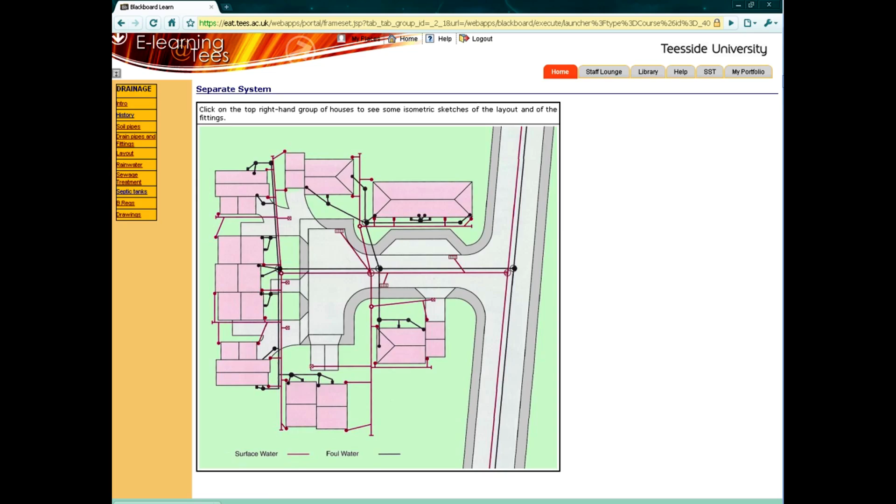So have a look through the website, get an appreciation. And when I say appreciation, don't try to remember all the little names of the different individual items. Get to know the main sort of layouts.

Understand what a pipe is. You've got your rainwater pipe that goes down into your gully, and then the gully goes down into your storm sewer. That would also pick up all of the gullies on the road, and all of that's going down towards the watercourse.

Then you've got the red here, which is our foul sewer. That's going to another gully, but picking up your kitchen waste, etc. And then you've got your toilet shooting all that stuff down into there. Everything goes down, especially in the foul sewer.

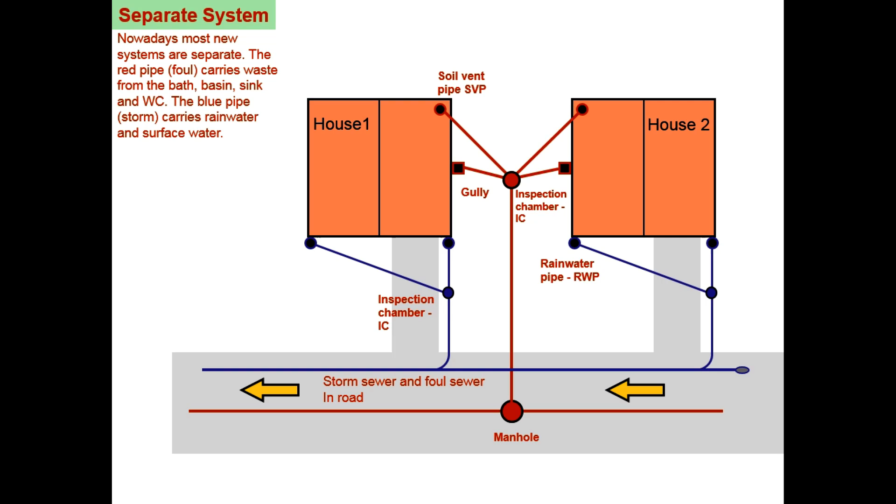You don't just unplug it and let the water go down the system, because the pipes couldn't cope with it. So they tend to go into tanks, and then it's let into the system at a rate that the pipes can cope with, and that you've agreed with the Environment Agency.

The video went through some typical components of a drainage system, and if you look through one of the exam questions, you possibly have to draw the layout of a drainage system or talk about the problems of a drainage system.

You've got all the rainwater gutters, and you probably won't be involved in designing toilets and pipework within the house. It may be that you will, but a lot of the time it's the mechanical engineers who do that. There's a British standard where you count how many baths there are and how many showers and toilets, so you can work out the system for a day when everybody uses everything at once. But it's usually mechanical engineers on larger projects.

For houses, the size of pipes tends to be standardised because we do the same type of things in our houses. So gutters and the down pipes are all standard sizes, and you'll find that most of the drainage we choose for a house tends to be the same.

There are rules about a minimum amount of gradient. If it's too shallow and the water's moving really slowly, everything you put down the pipe will stop a little bit if it's not moving fast enough. All the sand, the sweet corn, you go to the toilet and everything flows down, and sweet corn and baby wipes are a drain's worst enemy.

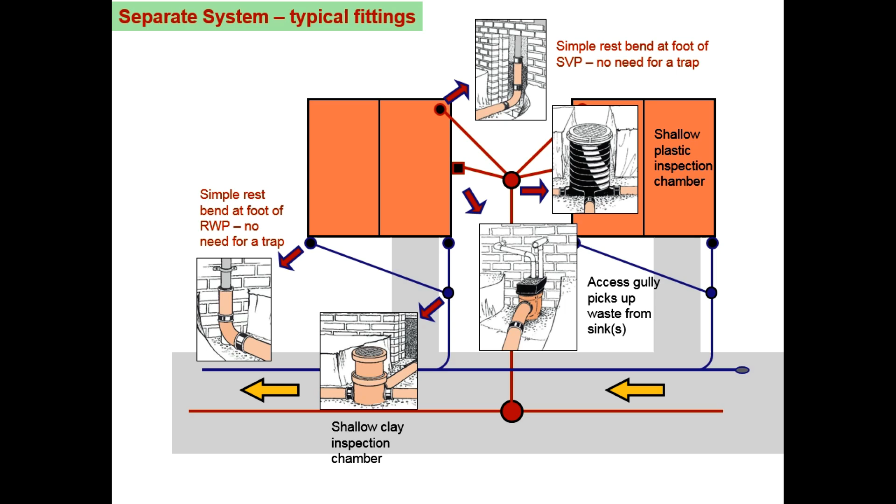So yeah, those are the main things to have in your head if you had to do a design. It talked about the different types of problems you can have on site, and you've got this drawing in your handout.

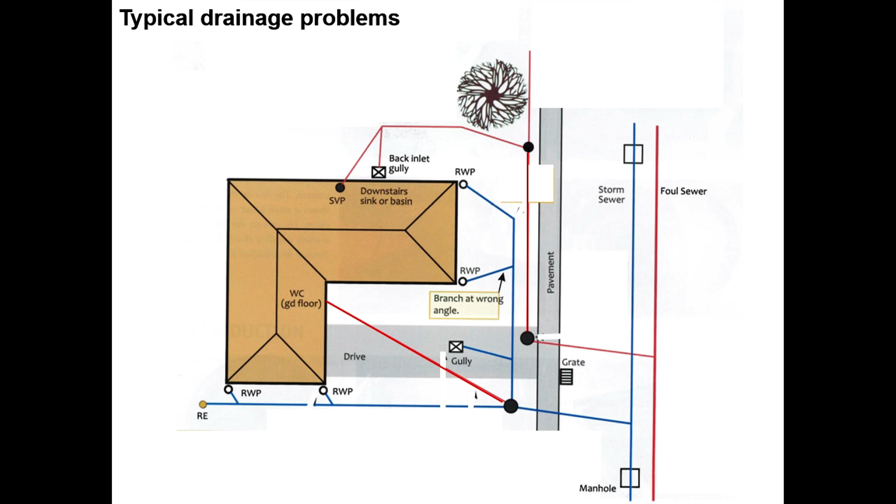Right, that's an overview. So I've given you a quick overview of drainage. So when you look at that topic, don't get too deep into it.

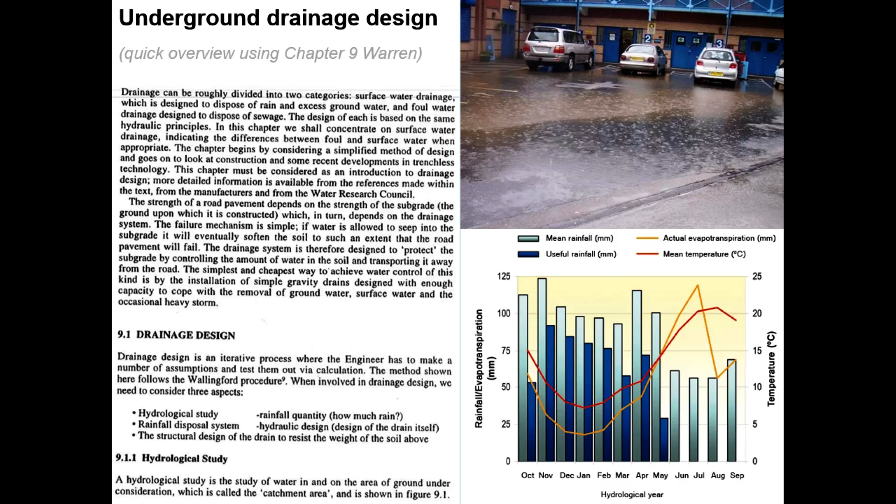When the rain comes down, it lands on an area called the catchment area. It's like a big net, and usually you would use AutoCAD and all the levels to work it out. Like this example in the booklet, there's going to be a dam here, and they want to work out what the catchment area is. It works out - this is the area, and you measure it in hectares, and all of that goes into that area.

Like in Middlesbrough, all of the water arrives everywhere and comes down a number of banks, and they go into culverts, and if there's too much water coming down, it all goes into Albert Park Pond. The pond itself has been designed - so there's our pond, it has a particular volume. So when there's loads of water coming down, raining everywhere, because the pipes can't cope with it, it fills up Albert Park Pond.

Now, civil engineers weren't maintaining the pond, so after a number of years, the bottom of the pond was full of silt and shopping trolleys and you name it.

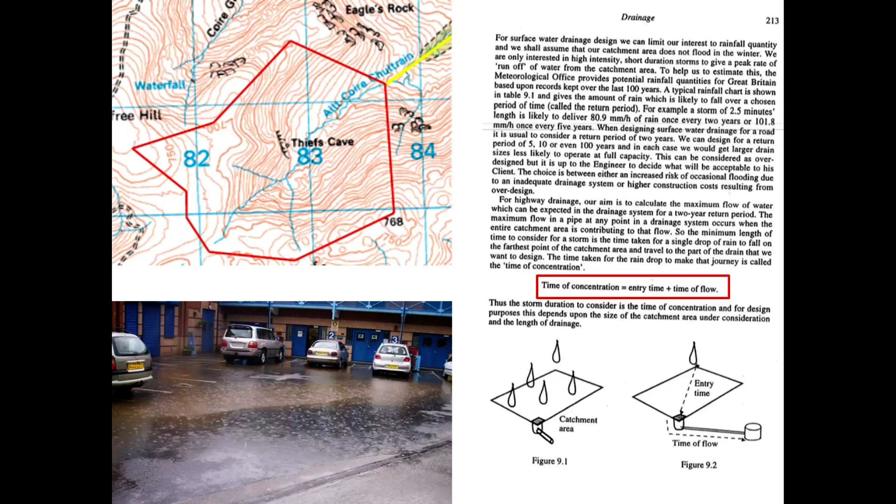I've given you some formula, most of them written down here. So we use something called the Lloyd-Davies formula, which is this one here - you want to highlight that. That's the formula: flow, or runoff quantity, the amount of water, that's Q, equals a fixed constant, which is always 3.610, times the area of the catchment area.

So it's the area that the rain's arriving on, and that's in HA, hectares. If you've got your area in meters squared, you can divide it by 10,000 to get it into hectares. I is the rainfall intensity, which we get from table 9.1, so that's the millimeters per hour.

P is how much water, after it's soaked in, makes it into the system. It's 1 for highways, meaning if all the rain landed on a highway, 100% of it would make it into the gully, so we times it by 1. If it landed on grass, we multiply it by 0.6, meaning 40% of the water soaks away and 60% makes it into the drainage system. So when designing, a highway gives a lot more flow than grass.

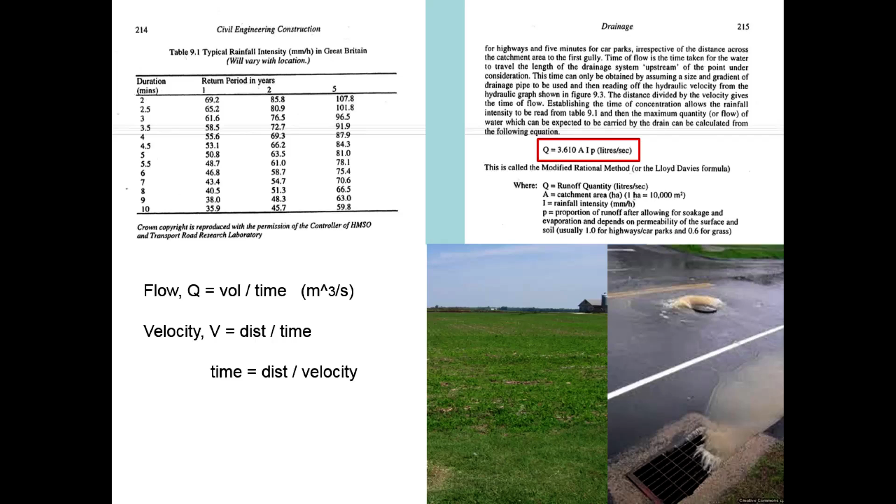Carrying on down the page, we've got our Lloyd-Davies formula. Just below that, once we've worked out the flow, we need to design the pipes. When we look at the pipes, you have K values. What the K values represent is, if you had clean water it would flow nice and easy, but if there was lots of sweet corn and Mars bars and everything else flowing down the pipe, it wouldn't flow as well, so you have a different K value.

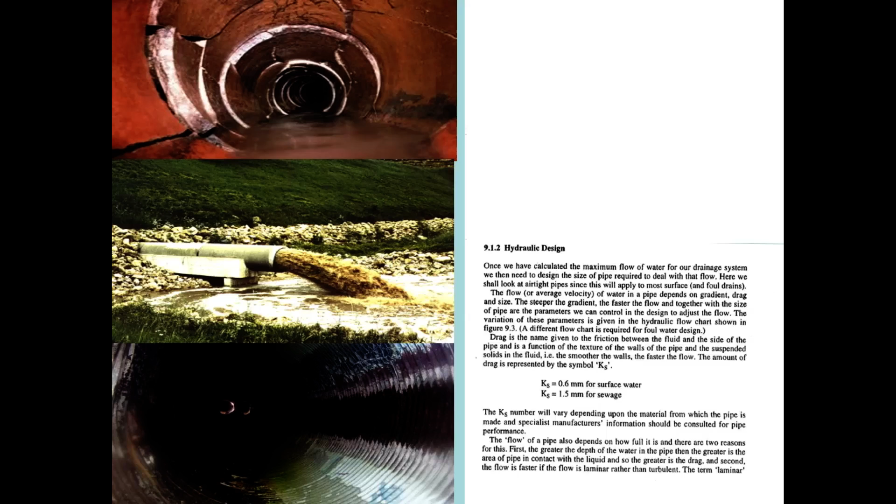You also have K values depending on the type of pipe. A nice smooth plastic pipe has a particular K value. If it's a corrugated iron pipe, very rough, the water coming down would need to be more storm water because of everything that could catch in the pipe. Once you know the type of flow and the type of pipe, you get your K value and can use the relevant table for each type of pipe.

I've written an example here and also put it up. Like in the video, it talked about the cover level—that's the level the ground is at, and the cover is the cover for the manhole. Have we done invert levels in surveying? Your invert level is the bottom of the pipe or the bottom of the manhole.

If you had two manholes 30 meters apart, that's 30,000 millimeters, and the height difference was 150 millimeters, you do height divided by distance, and 1 over that gives you the gradient of the pipe. So for this example, the pipe is 1 in 200. That's how you work out the gradient.

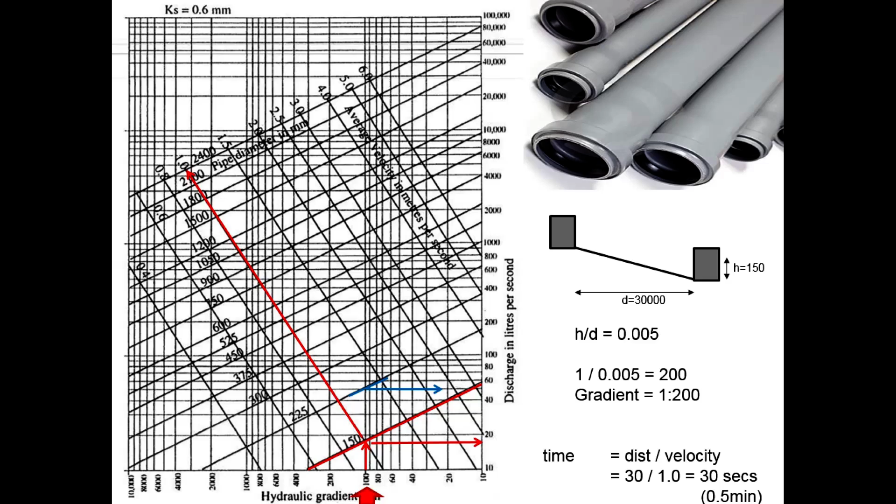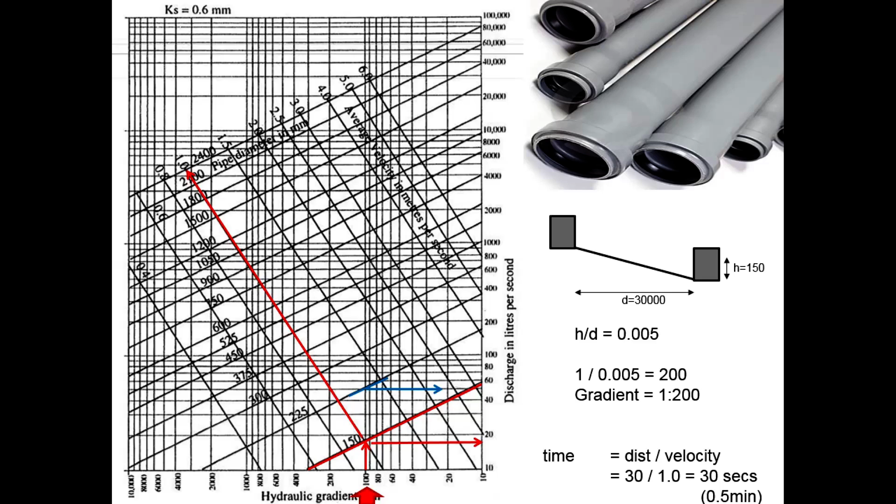To show you an example of how we can use this, and it's written down in the text, we'll go through an example here. If we had a pipe that was 150 diameter, we would highlight this one here. If our gradient was 100, you just draw up to that diagonal line, and at this point our average velocity of the water going through this pipe is 1 meter per second. And if you go across in terms of the flow through the pipe, it would be about 18 litres per second. So that's the flow, how full it is in the pipe itself. If our gradient was still 100, but we went for a bigger pipe, if we go up to here, then the average velocity would be 1.3 through that pipe, and it could take 50 liters per second. So that's how you would use it.

Now in the text we are given two examples, and I want you to make sure you get your head around these two examples. The first one is talking about a gully draining a car park, and the car park is 880 metres squared. We'll just draw this out so we can visualise it. Personally, with this topic, in terms of exams, trying to visualise what the question is saying can sometimes be the difficult thing. If you draw out what you think the question is saying - so we've got an area of 880 metres squared. It says there's a time of entry of 5 minutes, so our water drop lands on the outside of the area and starts making its way to our gully. There's our gully. Then it says the first manhole is 30 metres away, and it's this pipe that we want to design. So all the water is coming in, and slowly it'll be filling up. By the time that drop gets into there, and by the time all the water gets onto the end, this pipe is going to be at full capacity. So when we come to do the design, we're looking at whether it can cater at the end of the pipe itself.

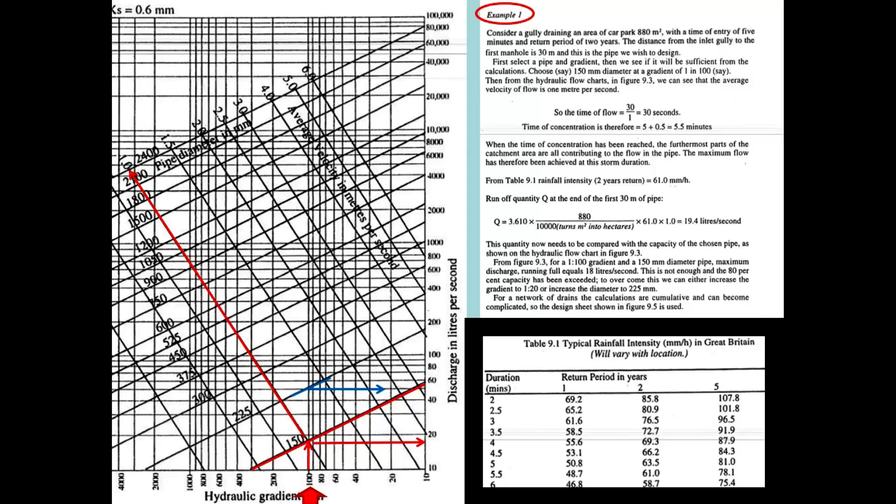That's the basics of designing all pipes. And lastly, I'll show you one other example, which just takes this forward.

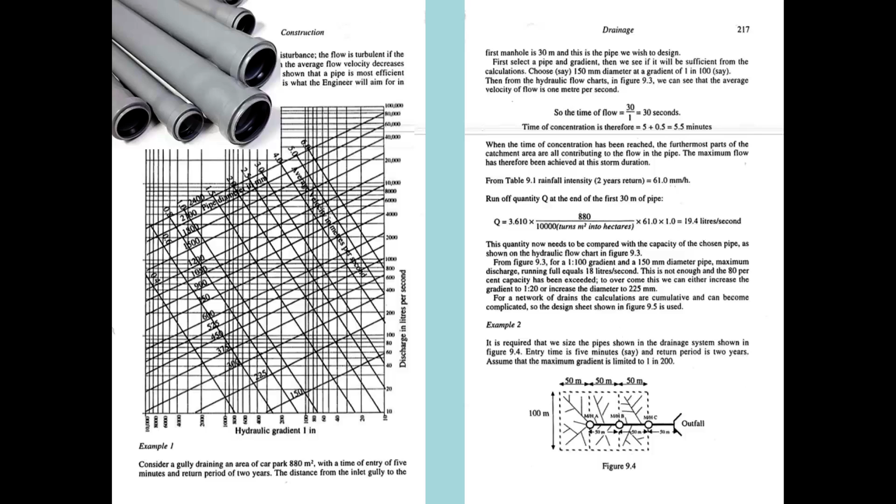This example 2 says it's required that we design the pipe shown in this system, so I've drawn it here also. We've got a car park, and it's 100 by 150. This area goes into drainage channels, like a drainage channel. I don't know if you've seen these - when you walk outside and all the rain's landing on the ground, there's some little slots, like a little metal slot, and they're discrete hidden drainage channels.

We don't design the drainage channels, but all of the water lands into these drainage channels, represented by these blue arrows here, and all of them send it into this first manhole. So all of the water in that area will go into there, then it starts going through the pipe. By the time you get to this manhole, you've got the water flowing through from this area here, plus the area of all this water via all the channels going into that pipe. So we've got a nice small pipe, next manhole, bigger pipe, next manhole, bigger pipe, and then you've got outfall into a water course or a beck or other.

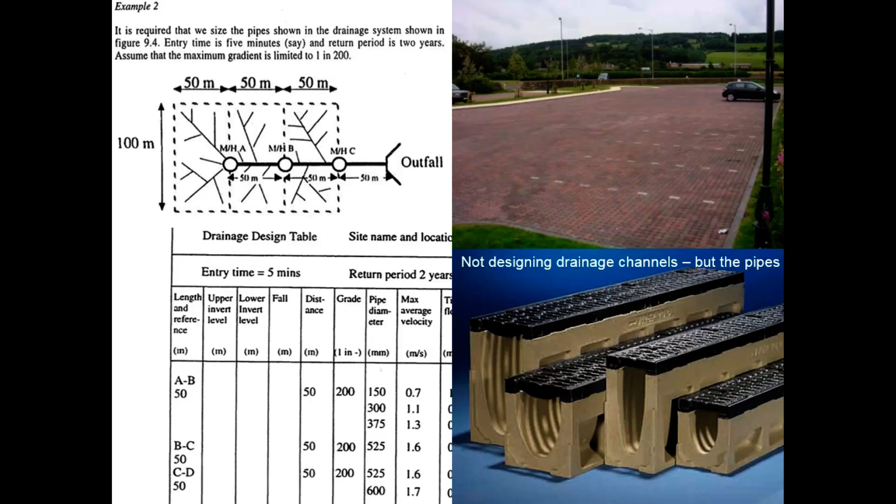And this table that you have goes through - I think of all the tutorial sessions that we have, this is probably the main thing that people would come and ask questions about. But we'll go through this table.

This is the Wallingford procedure. When you get into industry, you'll use a table like this to design drains. If it's a big system and the company's got some software, the software is called Micro Drainage, and it's based upon this theory. So we have the table itself, it's all set up where you've got the manhole, pipe A to B.

So what we're going to do is look at this pipe here first, and that pipe is taking in that area here. Now these here, if you know what the invert level is or the depth of the manholes, then you could work out what the gradient is. But in this example, we're saying that the gradient is always 200. So these columns are empty because we don't know what the invert levels are - we're just saying that the gradient of this pipe is 200.

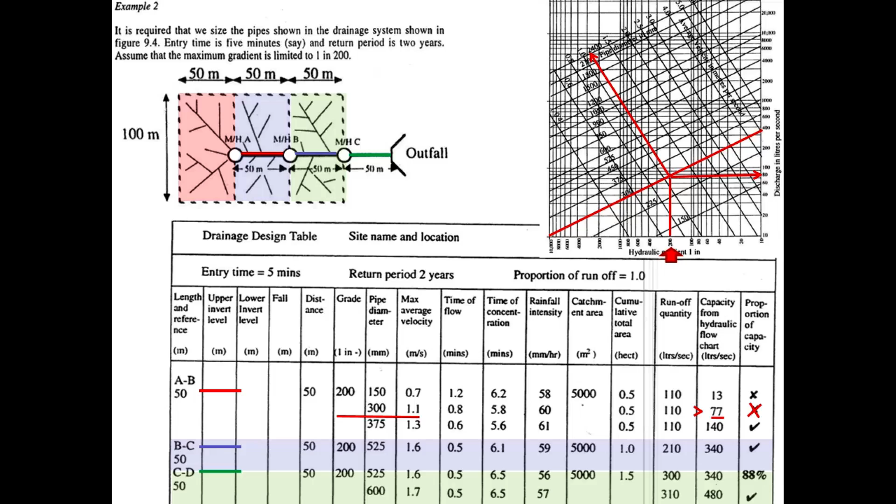Once you've got your size of pipe, the next pages depend upon whether you're in a field or in an area where vehicles will drive across the pipes, which determines how you put your pipes in. Normally you excavate your hole, put some nice 10 millimeter gravel in, and lay your pipe on it as a nice bed.

If you have a big stone underneath your pipe and a car rests on the ground above it, it snaps the pipe where the big stone is. That's why you put the pipe on the pea gravel. A lot of contractors prefer not to put it in though.

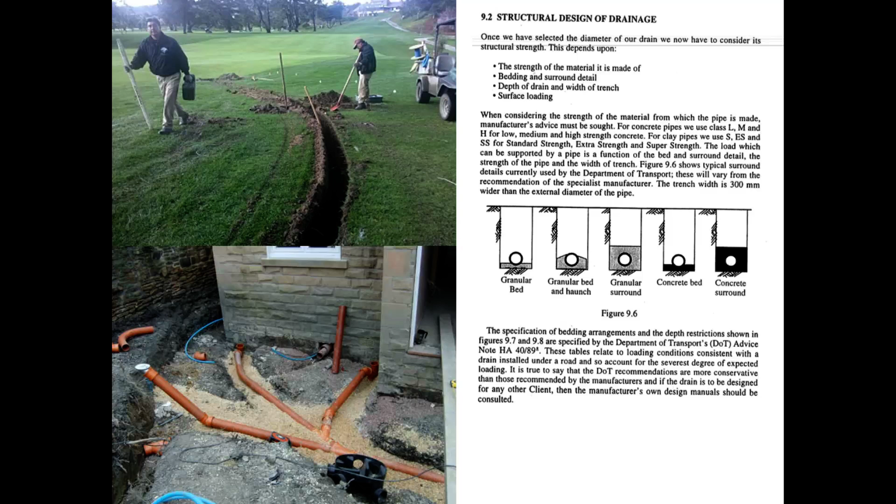Normally the building control inspectors want to see the drainage before it gets covered. If you've got a vehicle going over it, you can have concrete over the top of the pipe. If your drains are below the foundation, so the foundation creates pressure on the pipe, you can coat your pipe in concrete. So there are different methods you can do.

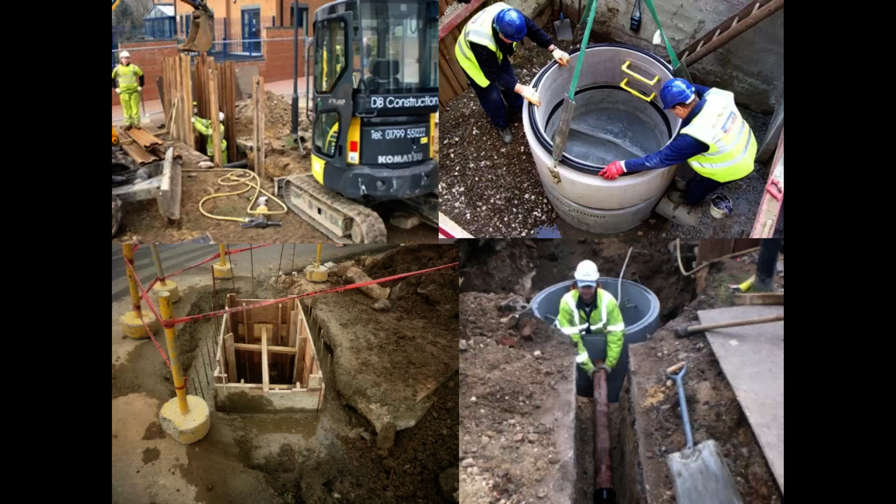Have a bit of a look around at the construction of pipes. We talked about manholes around the house. Manholes can be massive, you can have 3 meter wide manholes, so look at how you would put them in the ground, and particularly look to see how they're designed.

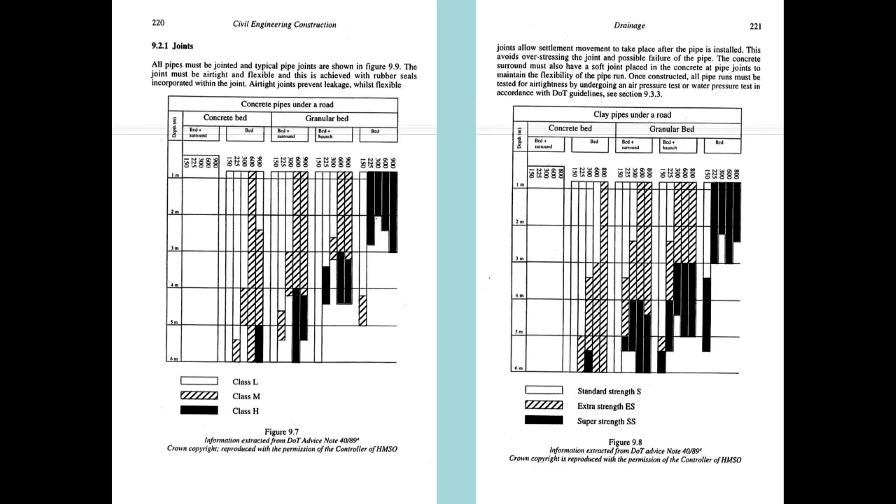If you've got this page in your handouts, it's saying that depending on which highways authority you belong to, it sets out what depth you go to and how you lay your pipe in the ground. I won't get into that much detail in the chapter. The video covered a lot of the issues of putting pipes through foundations, so that if the house drops down it doesn't snap your pipes. You have to have a rocker pipe, and at least a 50 millimeter gap around the pipe work.

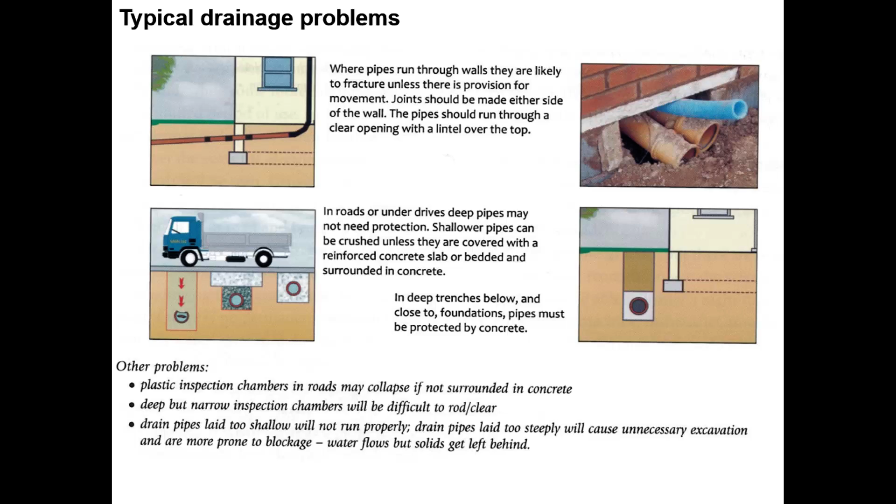Did anyone do drainage when we looked at the building regulations? No one wants to admit it. Remember we did the building regulations? Yeah, someone would have done drainage, so you would have picked up some of these points.

In terms of the drainage, it's quite straightforward, and it's an important part of your civil engineering career. That was your first little bit of calcs for this module. Come and see me when you've had a look at the table if you've got any questions regarding it.

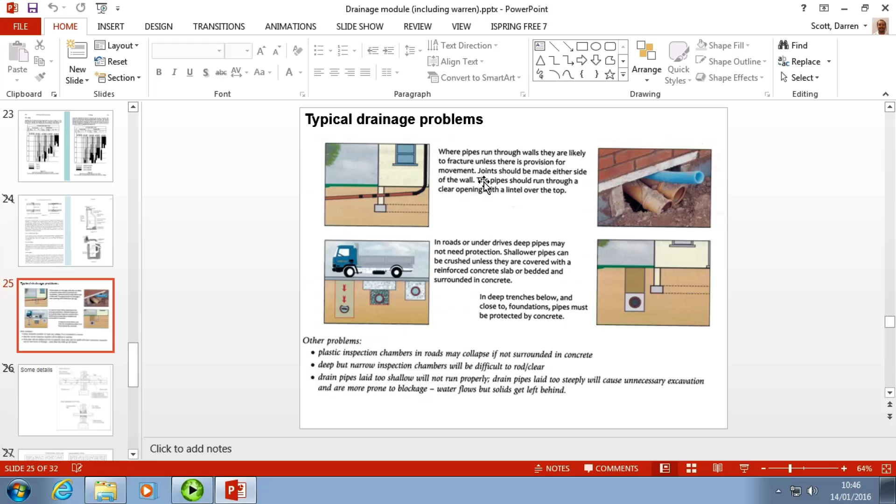Can I say also, just for the exams: today we've covered drainage, house drainage and some calcs. Last year I did dams, different types of dam construction. We didn't do that this year, so if you look through the exam paper and see a question on dams, you wouldn't get one, because you'll only be examined on material we actually cover in class. So when you look through the assignments and exam papers and realise we've not done something, it's highly unlikely you'll get it. It's annoying, unless I've totally forgotten.

But you were reading about dams this morning, were you? Yeah, it's like an extra on Blackboard about dams. But you never know, it might be. I can't remember, actually, I'm going to have a look to see what's on there.